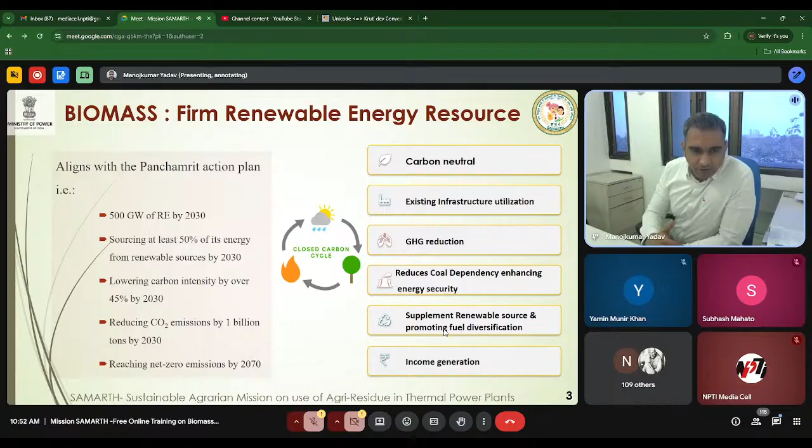And there is income generation from this process, which we will be seeing in the upcoming slides.

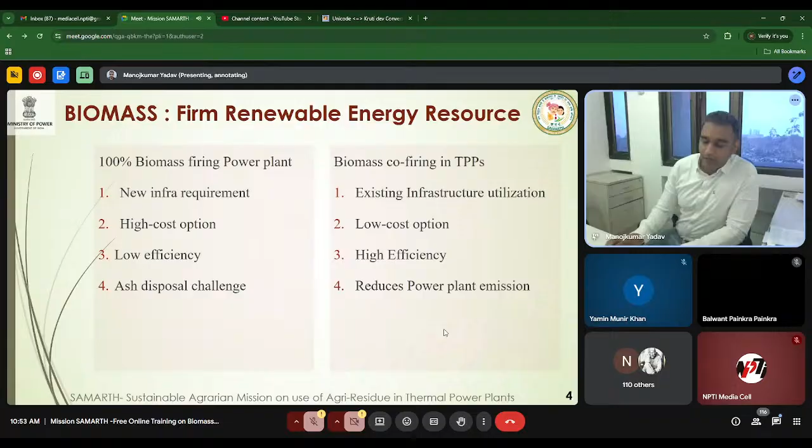This is a very common question, that if by biomass co-firing we can replace coal, why can we not move to 100% biomass firing plant? As I have said, it would require new infrastructure, which will be a high cost option. Also, it is a low efficiency option, and there will be other challenges as well. Whereas if we go for biomass co-firing, we will be able to do it with the existing infrastructure, and we will be able to implement it immediately. That flexibility is given by this biomass co-firing process.

So just to give a perspective, in India, around 774 million metric ton of biomass is generated per year, out of which around 228 million metric ton of biomass is surplus. Now, when we say surplus, in India there is a huge consumption of biomass in fields, fodder for animals, and other usage. In fact, in villages, it is also used for fuel purpose.

So besides that, the remaining biomass, that is 228 million metric ton, is still surplus. It is a huge amount of biomass. If we can switch to this fuel, it would aid India's move towards carbon neutral fuel. In India, thermal power plant installed capacity is around 218 gigawatt. If we go for 5% co-firing, we will be consuming only 38 million metric ton of biomass out of 228, which is around 20%. So the point is there is no issue from the raw material point of view.

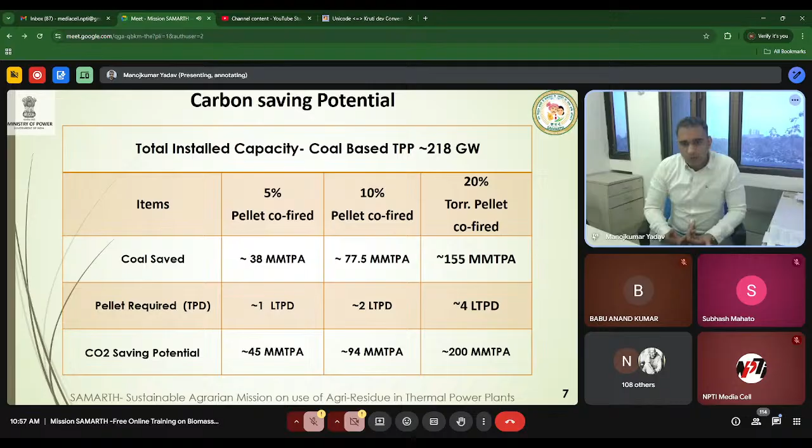How it all started: in November 2017, the government of India released an advisory to all power plants and state governments to start co-firing biomass in thermal power plants. Side by side, experiments were going on in NTPC Dadri. On 4th December 2018, in NTPC Dadri stage 1, 210 megawatt unit, they co-fired — the first commercial co-firing was done, successfully. They tried at 5%, 10%, and successfully co-fired.

In January 2020, they were able to co-fire in their 500 megawatt unit as well. So before implementing it at the all-India level, the government of India had already experimented and assured that there are no issues.

The next step was taken in July 2021 with the Constitution of the National Biomass Mission, because co-firing requires a strong supply chain and other factors to cater to. To address those problems, you need a dedicated team to make it practical.

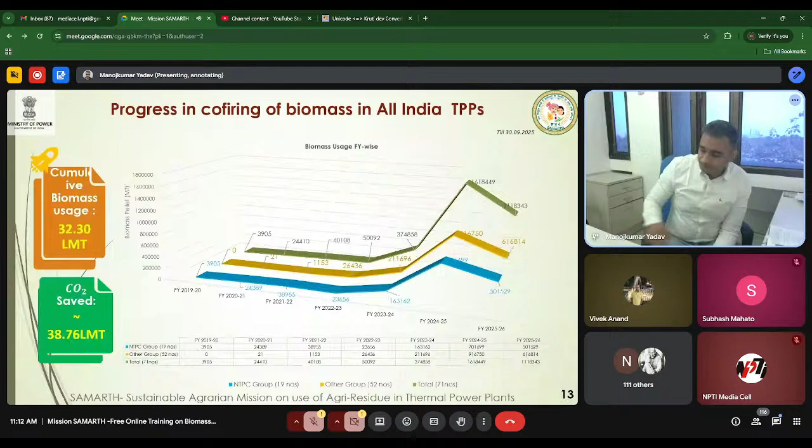So NCR has set a very good example, and they are leading the TPPs in NCR, especially the 11 TPPs which are co-firing. They have clearly created a very good example, co-firing for the last 5 years, but in recent years everyone has picked up 2%, 3%, 4%. So we are improving, and in most cases there have been no issues.

This should also add to our confidence in co-firing. That is what I want to convey from this slide.

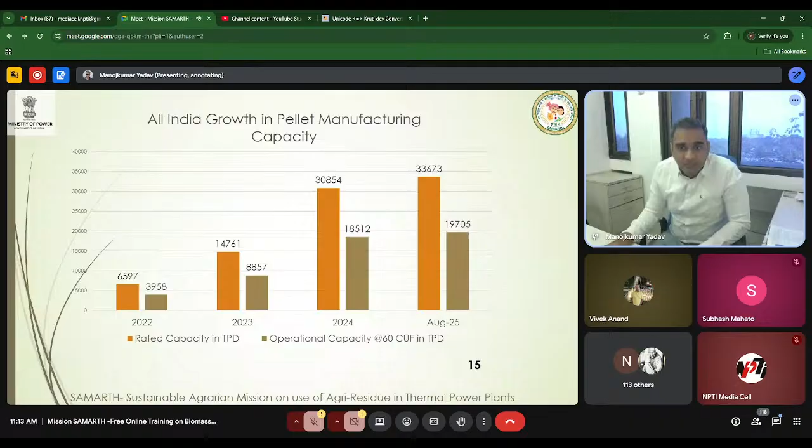Now, as I have already mentioned, co-firing has increased, and on a similar level, from 2022 to 2025, the installed capacity of pellet manufacturing plants has also increased, say 4 to 5 times. Co-firing has increased, and it has supported the pellet manufacturing capacity.

Now what are the challenges we are facing in this technological constraint? Standardization of pellet manufacturing machines, we are facing this issue. The people into pellet manufacturing can address this problem very well, that there is a lack of standardization. We are working on it. There is a committee, and the Mission is part of it, which is working on standardization of these pellet manufacturing machines.

Pellet production capacity, for the NCR region, there is a significant rise. We are expecting a similar increase in other parts of the country. But for that, we need the TPPs to come forward and start co-firing, at least start somewhere.

So that the co-firing process supports and creates a supply chain of pellet manufacturers. I think TPPs have a very major role to play in this, because somewhere they have to start. Once they start, automatically pellet production capacity will be taken care of.

Supply chain issues - to address these, it was mainly in the beginning that there were issues, but now it is getting sorted in NCR. I think we are not facing any supply chain issues now. Majority of plants are getting a good supply, so we are expecting to replicate this NCR model all over the country.

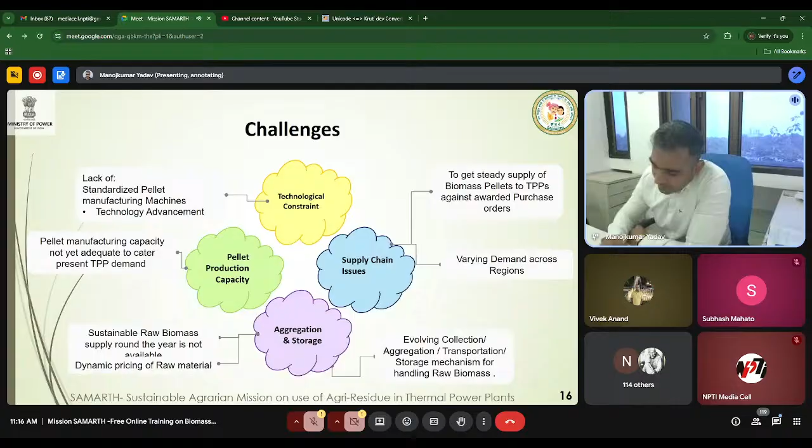Which are under research, and most probably we have not faced. It was on theory - if you go for the nitty gritty, we were expecting issues, but till date we have not faced any problem. On the positive side, we have increased co-firing from 2022 till date. It has been all positive till date.

Now, what are the thrust areas? From the mission point of view, in future we are expecting increased tendering and procurement by TPPs. We were getting feedback on how to start tendering, so we requested one of our NCR TPPs to present next, and he will give a very good insight into how they went about procurement of pellets, because it was challenging, and how they successfully implemented co-firing in their power plant. As I already said, NCR is leading, so in future programs also we will have this, because the person who has delivered will be the best person to tell us how they sorted out all the challenges.

Now the next is developing production capacity across the country. We have already shared that if thermal power plants start tendering and get into co-firing, automatically this change will come up. So somewhere thermal power plants have to take initiatives, and once they start, everything will fall in place.

And identifying proven technology - the torrefied and non-torrefied pellet technology is maturing, and as co-firing increases, this will mature more. Every technology, if you see thermal power plants 50 years ago versus today, has matured and gone to the next level, with a lot of control systems and automation. That will definitely come into it once co-firing starts.

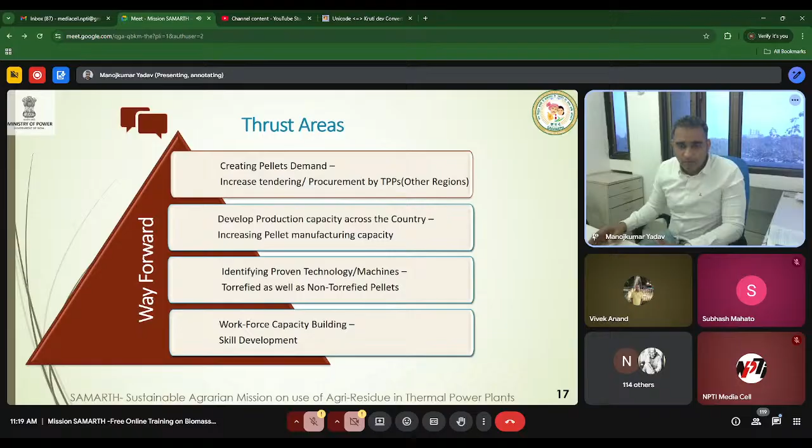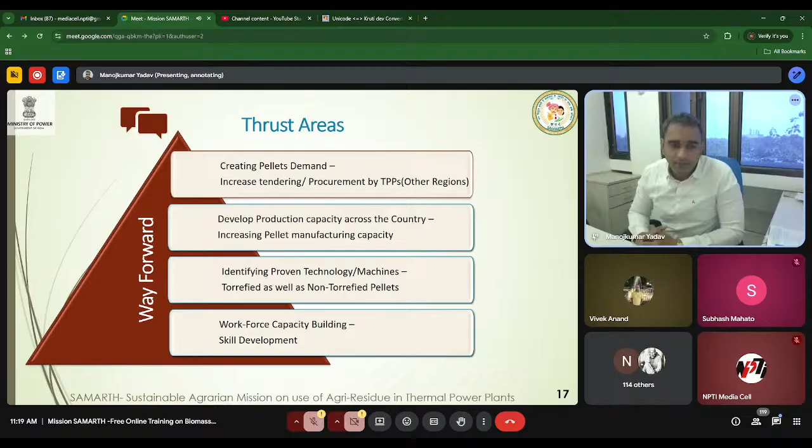So the point is, the government, the mission, everyone is trying to attack the problem from all corners. What are the issues we are trying to solve? That's what I wanted to convey, and thank you very much.

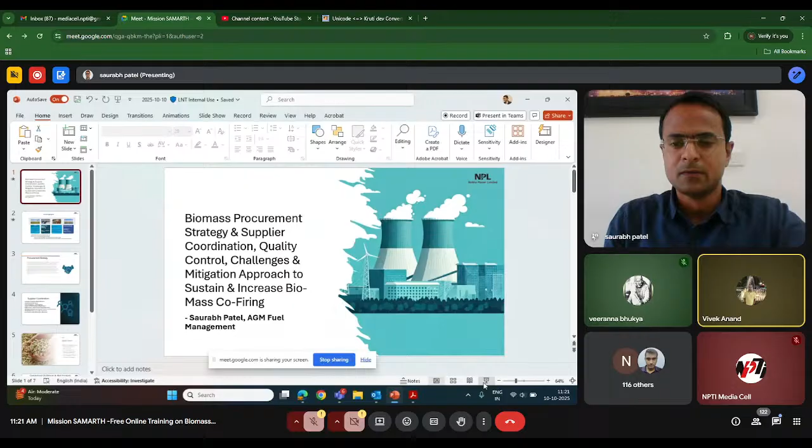Yes, good morning sir. Please. Thank you, sir. Yes. So, is my PPT visible to you? Yes, sir. Okay, so may I proceed?

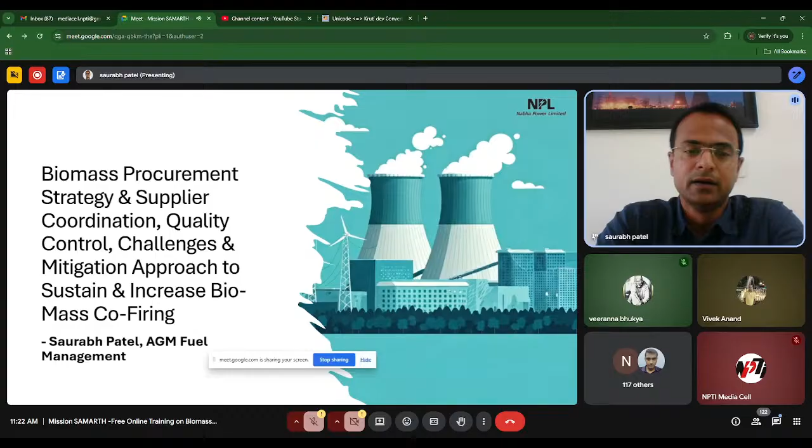Sir, please. Yes. I am Saurabh Patel and I am AGM Fuel Management at Nabha Power Limited. Nabha Power is a wholly owned subsidiary of Larsen and Toubro. We have our power plant very near Chandigarh, around 30 kilometers from Chandigarh, and we have a 1400 megawatt supercritical power plant here. This power plant has been built by L&T only, in joint venture with Mitsubishi Japan. We have this supercritical power plant, and we have coal linkages from Coal India subsidiaries like SECL and NCL.

Because our heat rate is one of the lowest, meaning our efficiency is highest, despite being far away from the coal source, our merit order is always at the top, because scheduling is based on merit order. So our scheduling is always on the higher side, and our annual PLF is around 80 to 85%. And because of our technology and all, our availability is around 95%.

Most important here to note is that our efficiency, measured in regard to the power plant, is measured in heat rate. Our net heat rate is 2268, and the gross heat rate is around 2100. Normally, CERC allows for 2250. So you can imagine what kind of technology we have and what kind of efficiency we operate at.

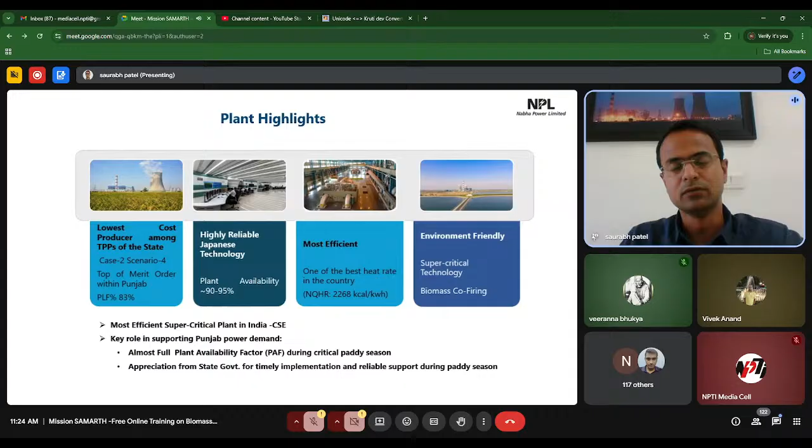And biomass co-firing, I will definitely go into detail. So this is the brief introduction about our power plant. Now I will go into the biomass co-firing procurement strategy.

Our coal consumption is between 55 lakhs to 60 lakhs metric tons per annum. As per the policy for plants within 300 kilometers from NCR, we are mandated by the Ministry of Environment to mandatorily co-fire a minimum of 3% till last year, and this year onwards a minimum of 5% of our total fuel. So last year we were required to fire around 1.8 lakhs, and this year onwards we are required to fire around 3 lakhs metric tons per year in order to safeguard from environment compensation.

Unlike other parts of India, within 300 kilometers from NCR there is a penalty provision. Apart from that, the Supreme Court and other central ministries are critically monitoring this, because the Delhi smog and the Punjab parali burning are always in the headlines of the country.

So the most important part, ultimately, it's all about business. Last year we were facing problems with contracting because the system was evolving. The first contract we adopted was the model contract provided by the Ministry of Power, which was based on certain assumptions. But every solution does not fit everywhere. We adopted the same model as it is, in our case.

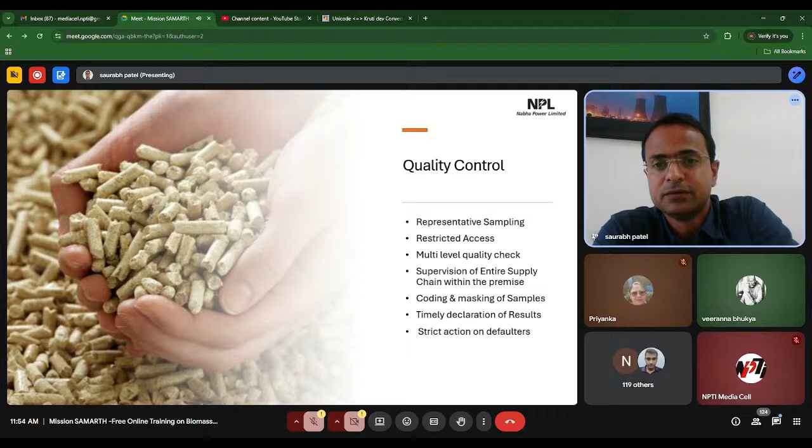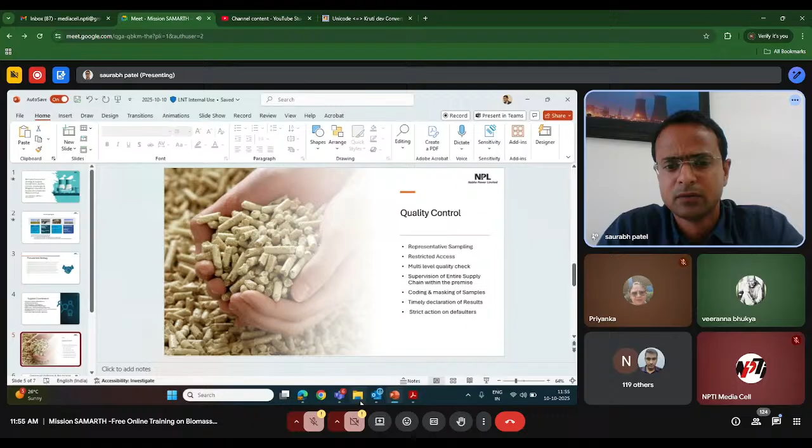I have some pellets with me right now. Can I show them? Okay, sir, thank you. What do you want to show? Pellets with me, sir - some pallets I collected from other manufacturers. So I want to show them. Please show.

This is the direct parali, with no process done before processing. Then after this, different sizes of pellets - non-torrefied, and this is also non-torrefied, different size. Then after torrefied pellets, this is the non-torrefied, and then after torrefied, this is the size. This was collected at the time of the DVC program conducted last year, and I kept these things so I wanted to show this, sir.

Thank you, sir. Actually it is not very clear, the photo that you are presenting is not very clear. So some people have not seen these previously, no? That was okay, thank you. They can simply search on Google - there are a lot of pictures available on pellets, yes. Okay sir, available, thank you. So PPTs, I think PPT is not required now.

The most important part is basically here - the quality control.

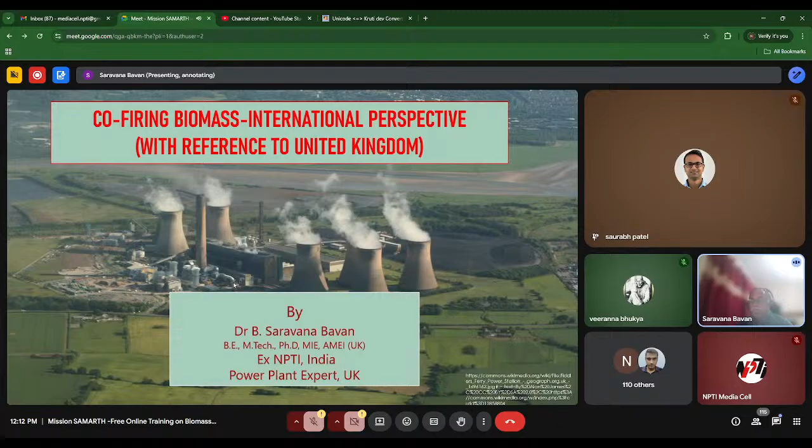In my presentation, it's basically based on previous presentations I have done over the years, and it's an updated version. My perspective is basically on co-firing biomass, how it has been done with special reference to the United Kingdom, and how it can be applied from the Indian perspective. I'm trying to keep that as the basis, and I'll try to cover as much as possible.

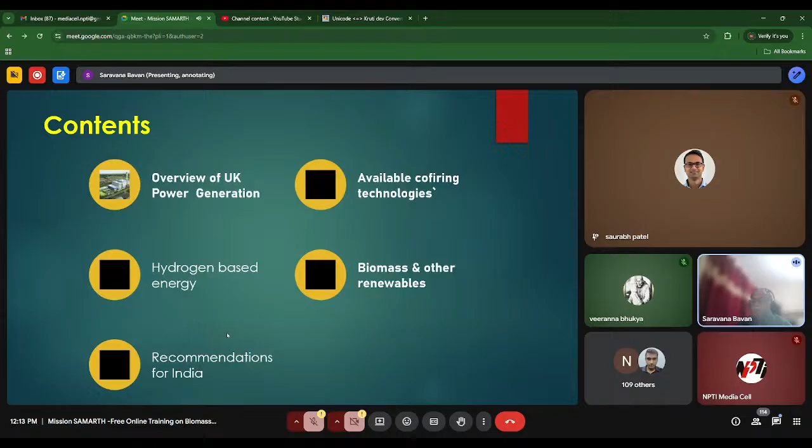Someone asked about how to compare this with the Indian power sector with UK power generation. So I'll give you an overview of UK power generation, then some available co-firing technologies, and recently hydrogen-based technologies, how biomass can help, and how biomass and other renewables are interlinked, and what perspectives we can carry from the UK to recommendations for Indian implementation.

In the overview, I'll provide some basic ideas like installed capacities, biomass mechanisms, and the situation about coal, how it has been utilized with biomass, what measures have been taken, and other aspects with respect to emissions.

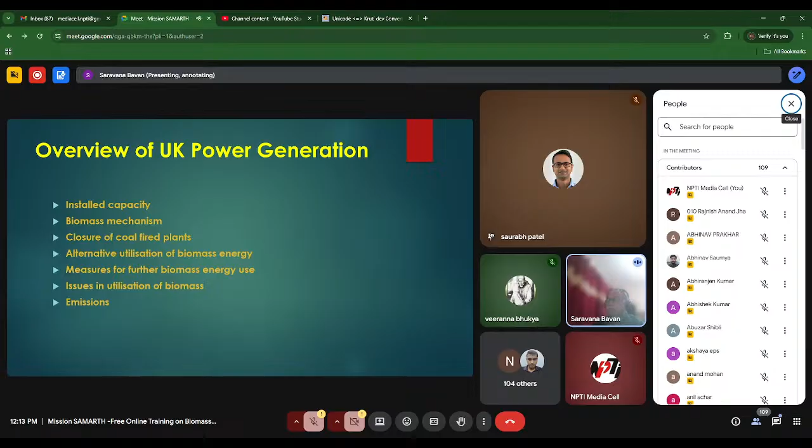If you see here, this is the UK plant capacity, roughly about 70,000 megawatt, that's the kind of range that's there, and the data is available further. But the mix has actually completely changed. If you see here, in 2020 the coal-fired capacity was roughly about 7,000, but now it's completely nil, it's zero. Oil-fired is also very low. The mixed and gas-fired is the largest volume, roughly about 40 to 50% of capacity, and the rest are like wind, solar, nuclear and others, that would be another 40%, and renewables and other things contribute roughly about 30%.

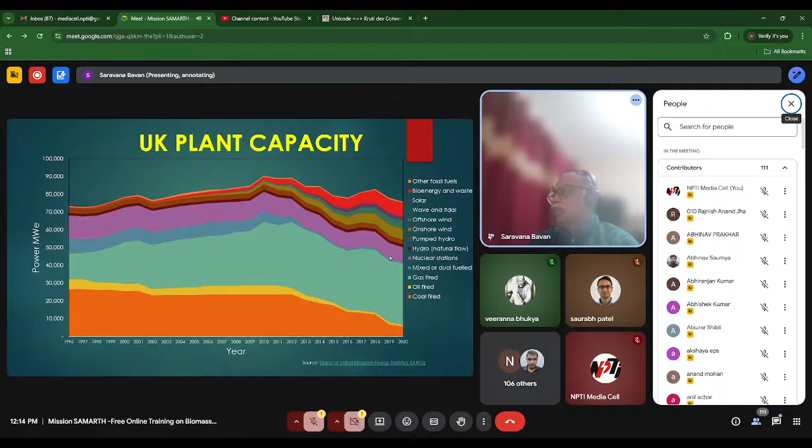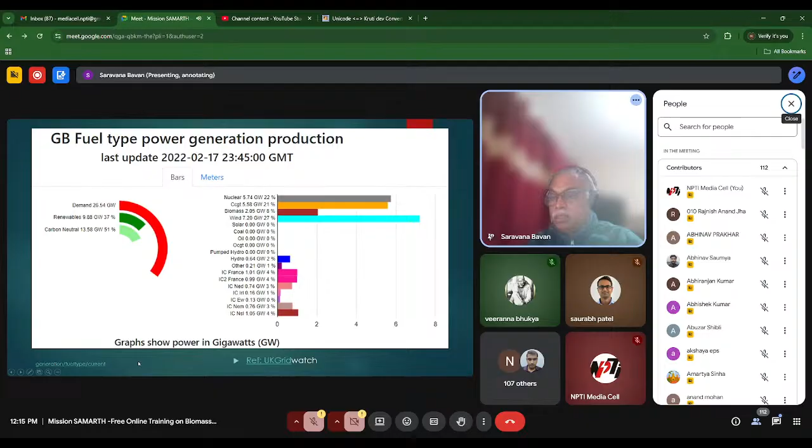So the mix is completely different, and you can see how it has been used live. If you can have the chance to see the grid, the UK grid is directly available, I can share it with you if possible, so you can have a direct view of what is happening in the current power plant scenario.

If you can see my screen. Sir, your screen is off, sir. Yeah sorry, presentation screen is off. Okay. Yeah, you can see now. It should supposedly work. No sir. Right now. Yeah, so yes sir, this is the real-time screen.

If you see, this is today's 10-minute average, and at the moment it's about 21,000 megawatt being used, and yesterday's maximum was about 30,000 megawatt, that's the range. In the smaller section you can find out how much each contributes. If you see the biomass, it's about 2.38, that's the kind of gigawatt.

That means out of the 30,000, roughly about 10% of that is being used, as shown yesterday. If you type 'grid watch' you can get that in real time. You can see individual things like carbon neutral plants, how much there is, in terms of number of hours, and get a good idea about how much nuclear and how much carbon neutral there is.

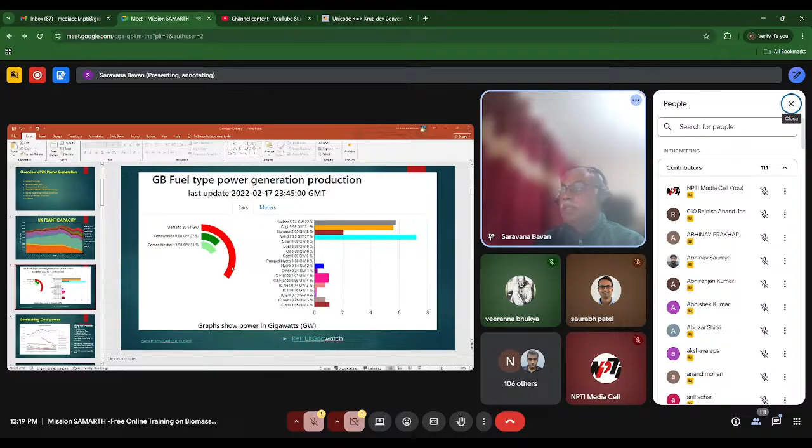Right, can you see the screen now? Okay, yes sir, this is about the power generation. Sir, can you show it in PPT mode, presentation mode? It is only PPT. Yes, sure sir.

So if you see this, coal is the major power source in India, but in the UK it was decided long ago, in 2023, there were only 3 coal power stations running: West Burton, Ratcliffe, and Kilroot. In September 2022 West Burton was closed, in 2023 Kilroot was closed, and in September 2024 Ratcliffe was also closed. So as of 2025, we don't have any coal power stations in the UK.

If you take the renewable energies, it comes with dual fuel firing, meaning some energy comes from conventional sources and some from renewables, plus pumped hydro and bioenergy.

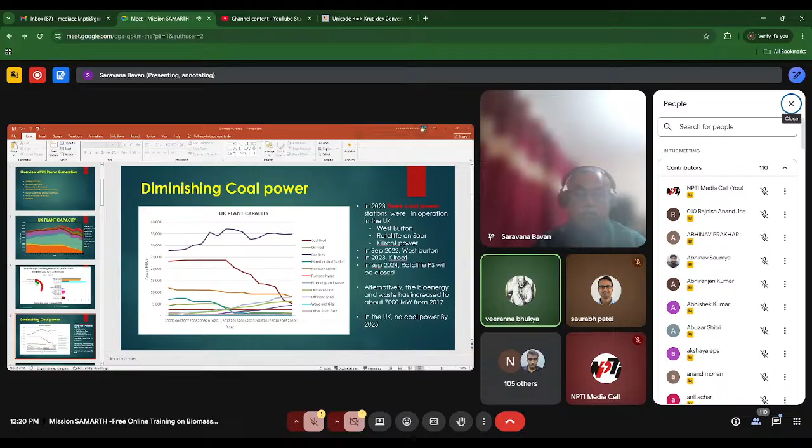Sir, one request, can you go to the PPT mode, presentation mode? It is only PPT. Actually full screen is there. When you go to presentation mode... Sorry, I may have shared my screen wrongly. Just one minute. It is not wrong sir, it is correct, but click the presentation mode, full size, below on the left side, right side, bottom corner, presentation mode is there. Press F5.

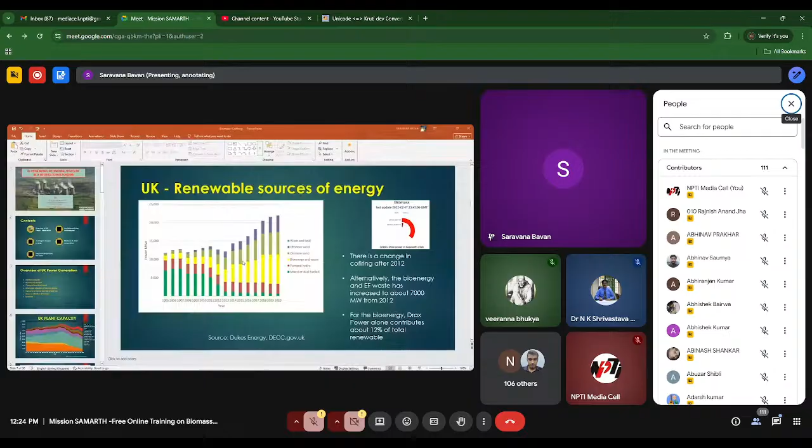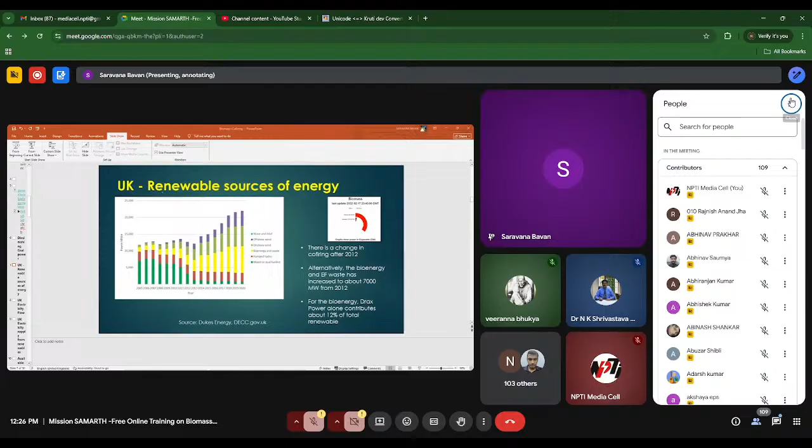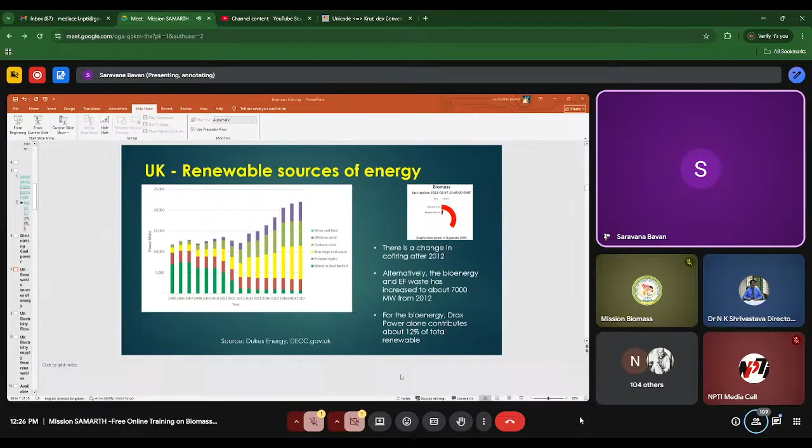For me I'm getting the full screen, but not sure why it's not coming here in this way. Sir, it is seen, no problem, you try another way. Please carry on. Sir it is now full screen. Is it okay now? Yes sir. Hello sir, it is now okay sir. Sir your PPT is quite visible, please continue. Okay, right, let's go this way. I have no idea why full screen doesn't work here with Google, I tried on my computer and it is full screen there.

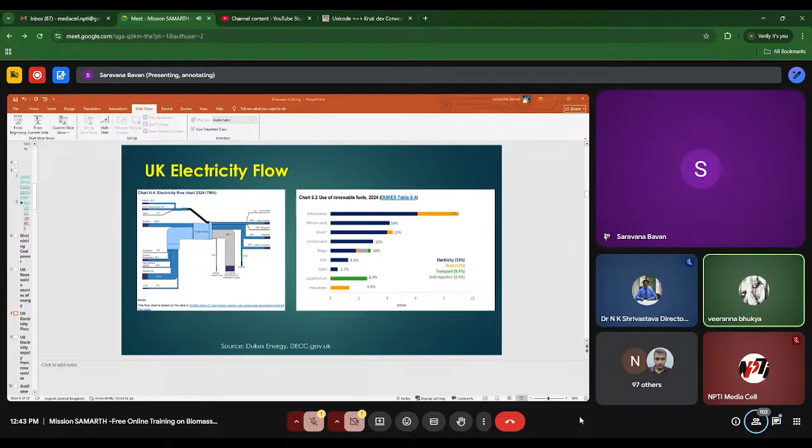Sir? Sir? Saravana sir. Sir, any problem? Saravana sir?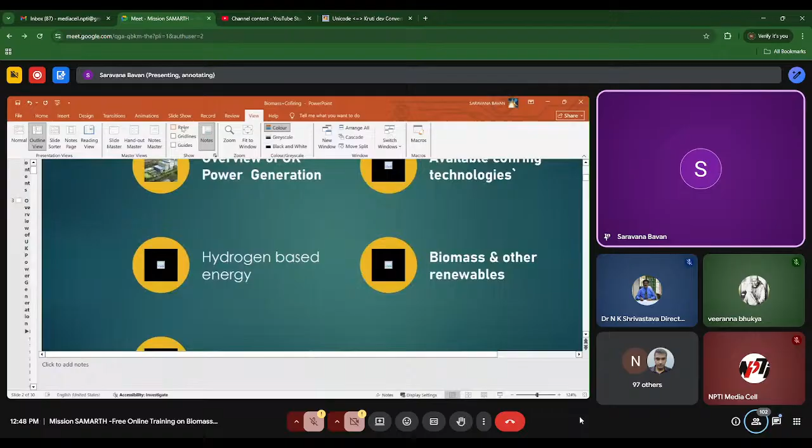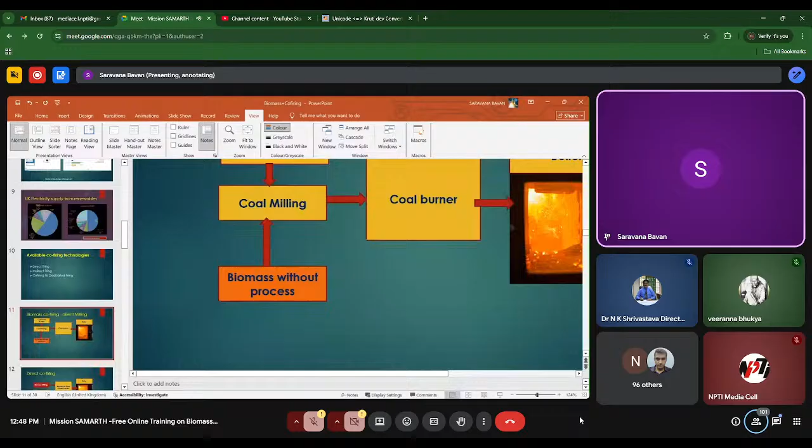Yep. If you see this, I've mentioned about the direct firing and indirect firing methodologies, and there are some benefits which are provided by the government.

Mainly in terms of funding that is given through an obligation certificate. They call it a renewable obligation certificate, and they are providing it as incentives for the users. If you are running from biomass, then there will be some extra tariffs they give, and if you're using biomass, they give some discounts for homes using biomass.

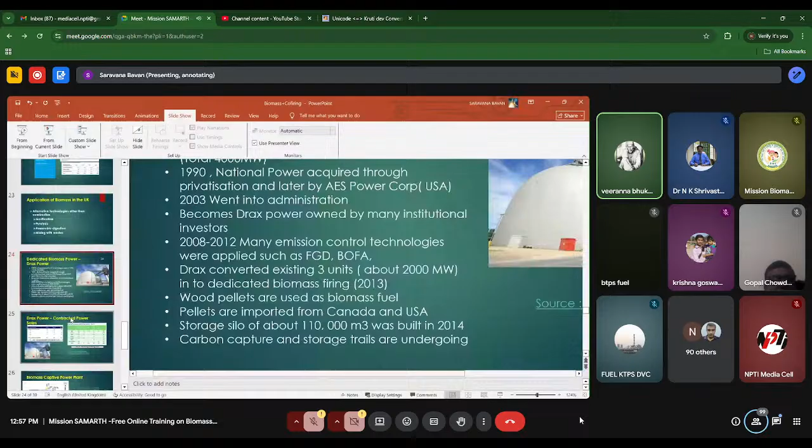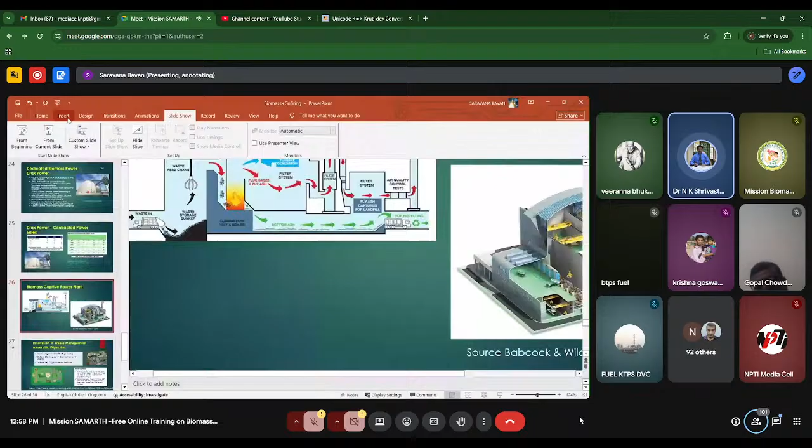Saravanan sir? Saravanan sir? Sir, I think you are muted, sir. Please unmute yourself. Hello, Mr. Saravanan. It seems that you are mute right now. Please unmute yourself, then we'll get the voice. We are not getting your voice. Mr. Saravanan, please can you respond? Just unmute yourself. Mr. Veeranna, please inform him. Sir, I am calling, sir.

Oh yeah, I think it was actually clicked mute. Can you hear now? Okay, yeah please, now you are audible. Yeah, I'm sorry, it was accidentally mute or something. It's okay, I have no idea.

Sorry. This waste or any biomass which comes here goes to the storage bin, and then that is used with the feeders, and the feeders help to take them out and put it into the combustion area, and then the gravity flow takes place, and it is combusted in the furnace or the boiler.

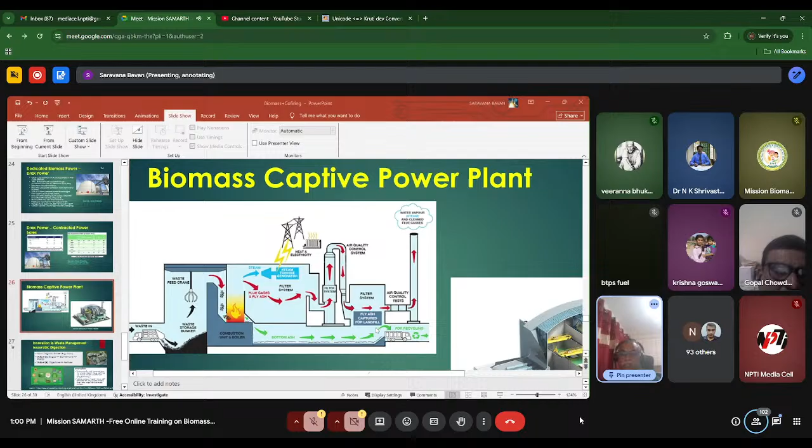So in a captive plant, this is the basic thing, and this design is actually developed by Babcock Wilcox, and the whole plant would be looking like this arrangement.

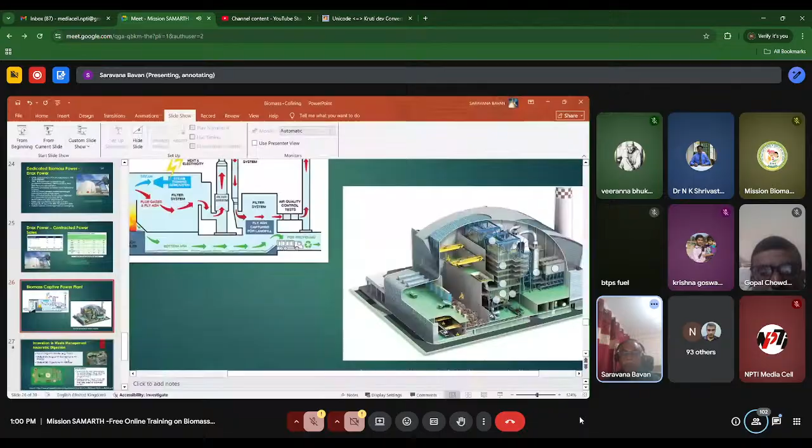Anaerobic digestion basically - they have the organic waste which is collected, and it goes to the digester. In the digester, it is permitted for fermentation and, through microbial actions, converted into natural gases. This anaerobic biogas is used and then purified, and it can be used for power generation and other things. This is also being practiced in some anaerobic digestion plants in the UK.

Most of the food waste is actually being used in this methodology.

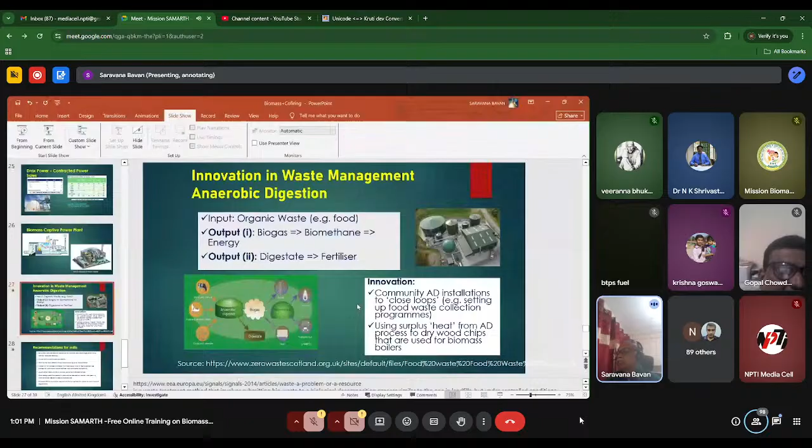The recommendations, what I could think from the UK perspective, is basically most of the things when we are using for direct firing - India already has a very good mechanism for direct firing. There's no issues because most of the biomass is collected, domestically used, and consumed at village levels. But the thing is, when it is going for crop firing and other areas after agricultural activities, it creates big environmental pollution. So those kinds of things could be avoided.

That can be done through the biomass and the collection mechanisms, and we can use this for co-firing and dedicated biomass methodologies. The plants can be installed near the sources, so that villages and other areas can collect and make use of it. We try to minimize the value added biomass fuel, because that increases cost. If you're going for too much fuel processing, milling, and transportation, then it's not viable for any plant to run on. Sometimes it's very difficult to meet the cost benefit analysis.